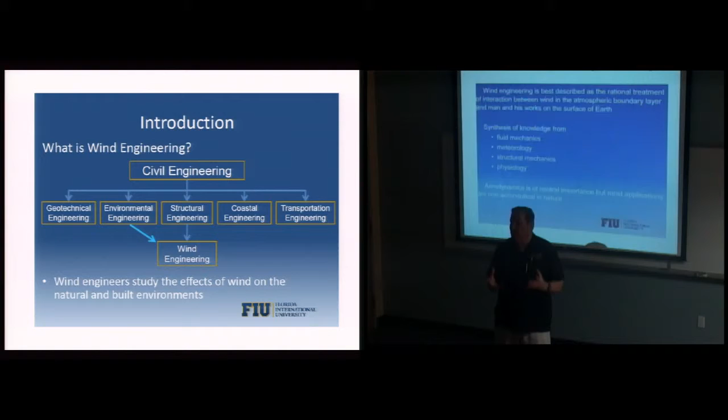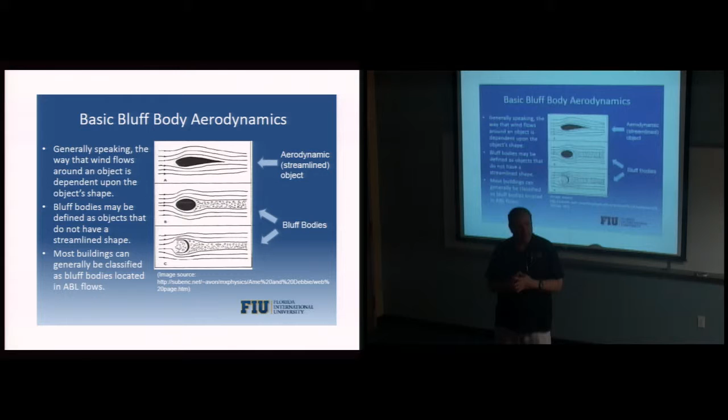You all are going to be able to have a real, firsthand experience working with the real Wall of Wind. Not everybody gets that opportunity, and to be able to come in and use this facility is a great opportunity. On the website, you'll see videos from prior competitions and media coverage, lots of information, and technical papers to learn about the content.

So what we're going to do now is show you a PowerPoint. This PowerPoint is going to talk about this year's new challenge. To do the challenge, you're going to need to understand some of the engineering concepts involved. Each year, some engineering concepts stay the same, but there are also some new concepts related specifically to the challenge. That's what you're going to hear today, along with the rules and guidelines for the challenge.

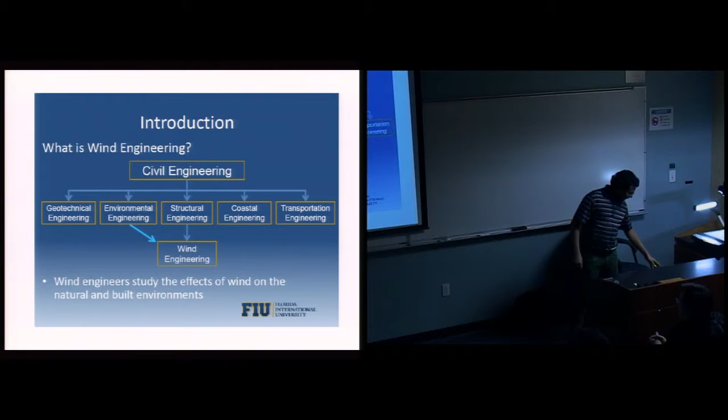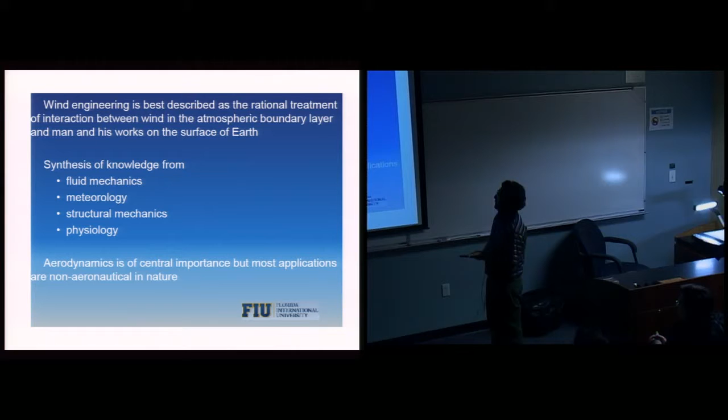Welcome everybody to the Wall of Wind Challenge 2015. As Eric mentioned, we are going to go through some basics. Wind engineering is basically a part of civil engineering, and we always deal with wind-structure interaction. We're going to show you a few things about wind engineering. Wind engineering is a multidisciplinary topic — it involves fluid mechanics, meteorology, structural mechanics, physiology, and other things. Aerodynamics is of central importance for wind engineering applications.

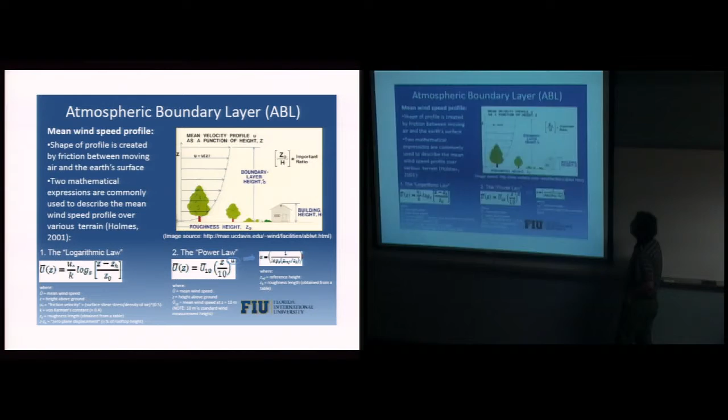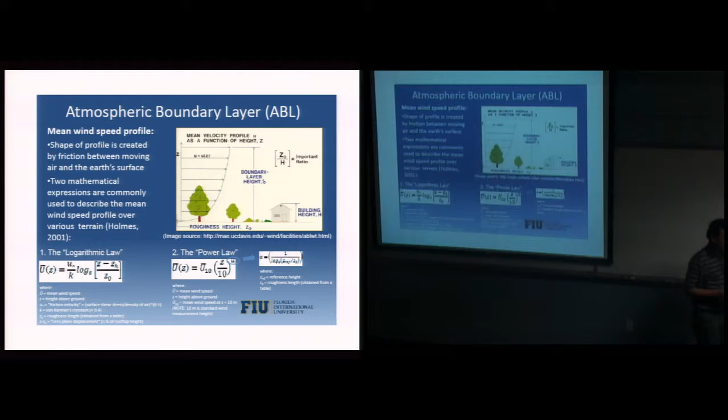For the competition, you need to know a few facts. If you look at this schematic, you see a building and a wind profile. Can you tell me why the wind speed increases with height, and near the ground it's very low or almost negligible? Any idea why that happens? There's a little more friction near the ground, and trees also stop it. Any other explanation?

Okay, I think he's absolutely correct.

Near the ground, we have so many things blocking the wind, so it produces friction. As we move higher and higher, the wind speed increases based on a power law. So when you envision the wall of wind running, the wind speed near the ground will be lower, and it will gradually go up in that profile. That's important for you to understand.

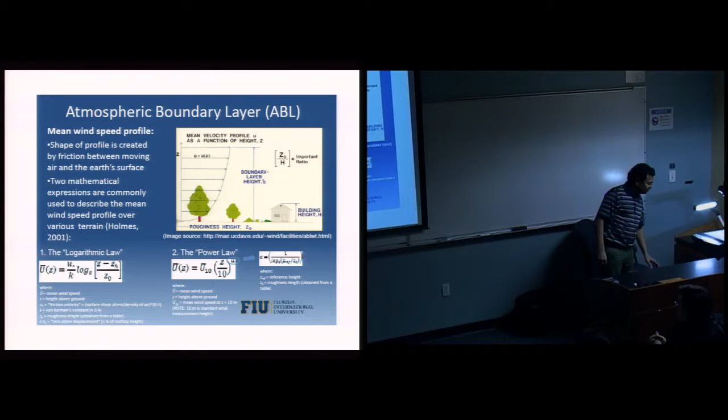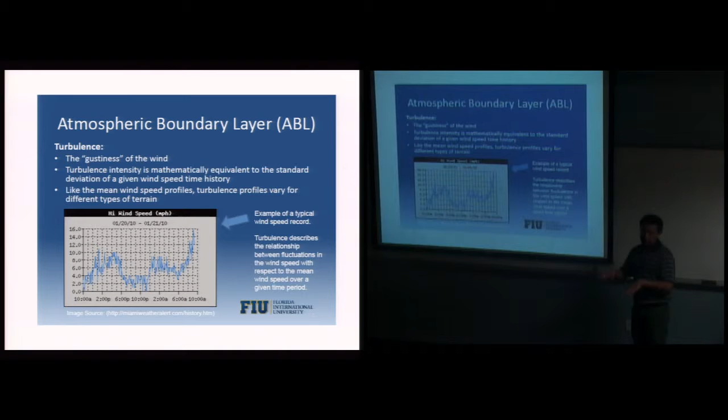Also, as you can see in that picture, the wind speed is not uniform. It's not a constant like 10 miles per hour, but you can see the mean of the wind speed plotted here is about, let's say, 5, and the wind is turbulent, so the speed changes with time. At the wall of wind, you're going to get these kinds of turbulence effects, so the wind is not uniform, the speed is going to change. Sometimes it will go higher, sometimes lower, and that's how it behaves.

Can someone tell me what the top picture is? What does it look like? Exactly.

And these two are more like rounded shape or irregular shaped bodies. What do you see is the difference between picture A and B and C? Let me tell you that these lines we see are called streamlines. It shows how the wind goes, how it varies after it hits the body, and this is the downwind side of the body. So looking at the streamlines of A, B, and C, what difference can you see between those bodies?

Yes. The aerodynamic object is able to utilize Bernoulli's effect so that while it's small, the air goes around and meets together at the same time, while the others are irregularly shaped, so the wind is kind of being violently pushed around that object. Very good. Anyone else?

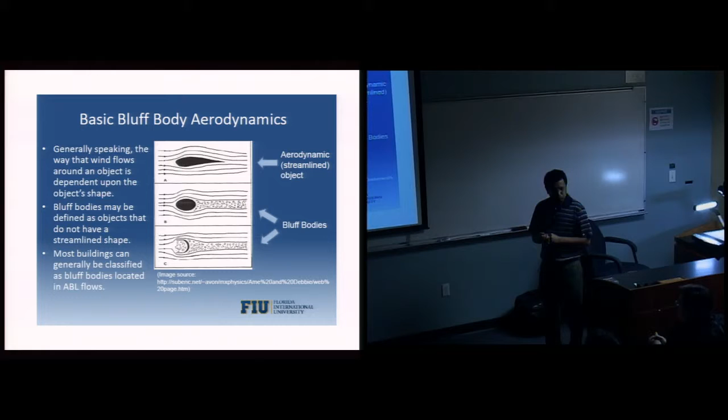Yes, wind turbulence, okay. Because picture A aerodynamically passes through the wind compared to B and C, which actually obstruct the wind and make it harder. More friction is on the object, so it moves that out. The first one flows through the wind compared to the others, which actually obstruct it. Okay, very good. Anyone else?

I think both are very good explanations. So the top body is an airplane wing. It's called an airfoil shaped body, and it's aerodynamic, or streamlined. You can see that the streamlines remain mostly attached to the body.

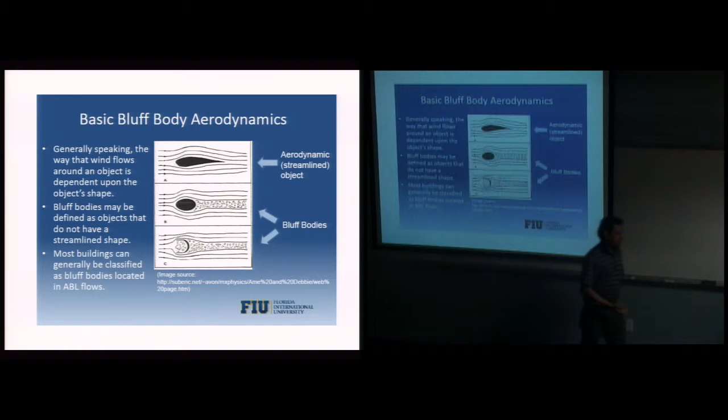Here, because I have a rounded body and this is another irregular body, I form a wake because the wind separates. It cannot negotiate that abrupt ending of the body. So all I have here is turbulent wakes and a lot of turbulence in the flow. Buildings are like that, or any civil engineering objects, because they are rounded or sharp edge bodies, unlike planes, and you're going to see those effects.

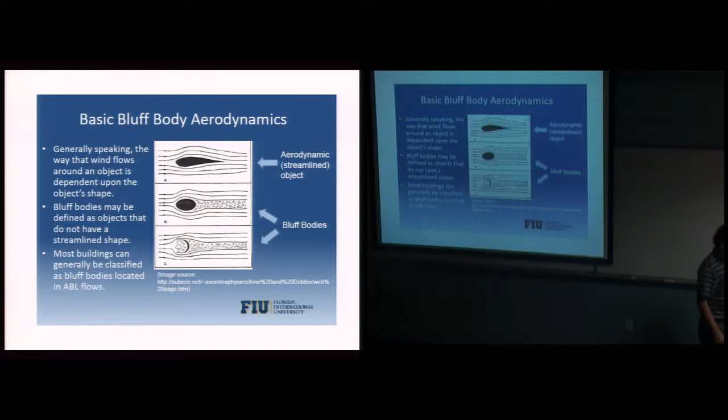So these kinds of bodies we call bluff bodies, and the top one we call streamlined and aerodynamic bodies. This is an example of such a bluff body which has sharp edges.

What you see here is the wind coming and it hits that corner and the wind separates, just like, because it's not a streamlined body like a plane wing. So what you create here is a lot of turbulence and vortex that form, and you can have very high uplift or suction pressures. In hurricanes, you've seen tiles flying off the roof and shingles flying - that's because of that kind of uplift pressure on the roof.

And as the wind hits, some of the wind comes down and forms a standing vortex at the lower portion of that building. This portion is very important for this year's project that you're going to do, because that's what we are looking for, because that's a problem. Why is that a problem? Because if people are standing here, then they feel that wind and those big standing vortices, and it becomes a problem for pedestrians. All right?

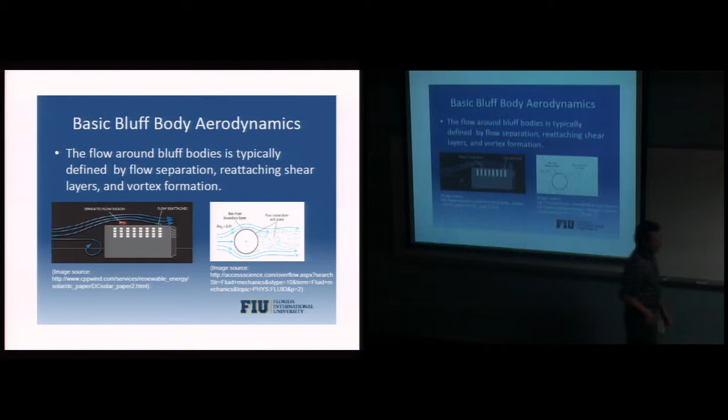A wall. A wall with holes.

This barrier will have an effect on reduction of the wind speed that person is going to see. So without the windscreen, if he sees, let's say, 20 miles per hour, then probably with the windscreen he's going to see 10 miles per hour or so.

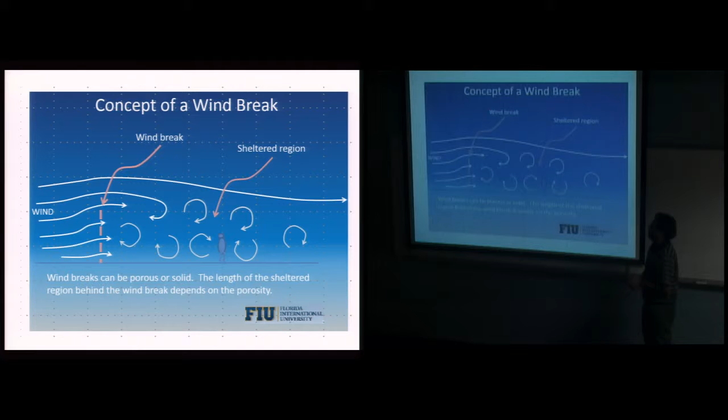And wherever it comes, if people are standing there, they can feel very uncomfortable. So don't ever think that just putting a solid is going to make things good, or putting it very porous is going to make things good. So there is a middle ground of what porosity is going to be the most effective or optimum for this person to feel the least effect of the wind. Is that kind of clear?

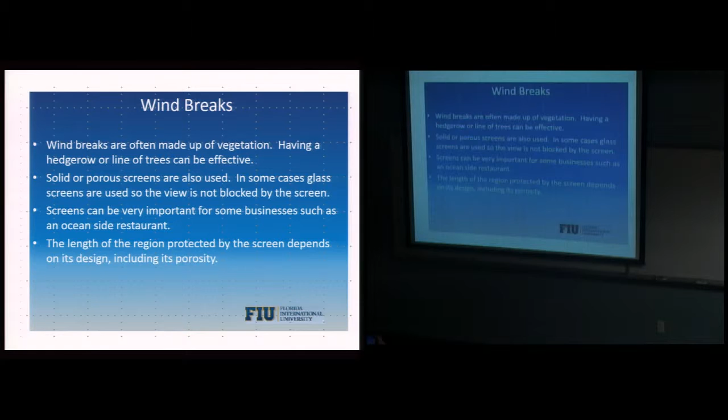Because that's the crux of your project. So wind breaks are often made up of vegetation and other kind of things. We can use either solid or porous screens. You're going to get this presentation, right? Okay, so you can read all of that, but I'm just giving you the main points.

So here is a porous screen, and the porous screen has a capacity of stopping some of the wind. We can define the solidity ratio of this screen by the solid area, which is the total area minus those holes, divided by the total area. That's the solidity ratio. And the porosity ratio is if we just take the holes and divide it by the total area, that gives you the porosity ratio.

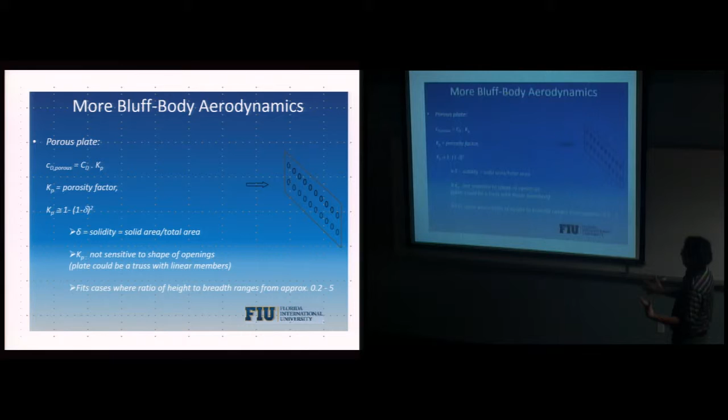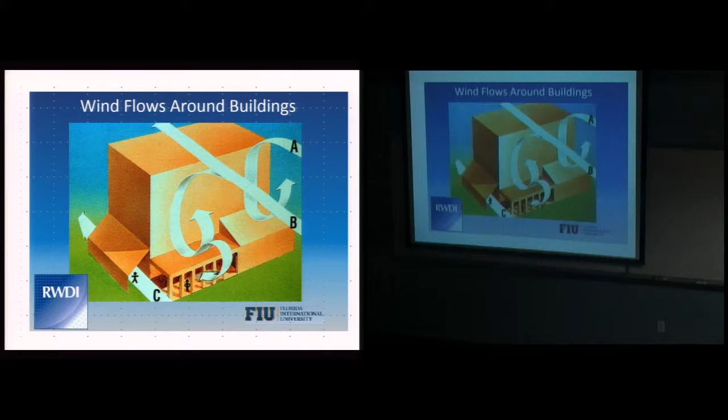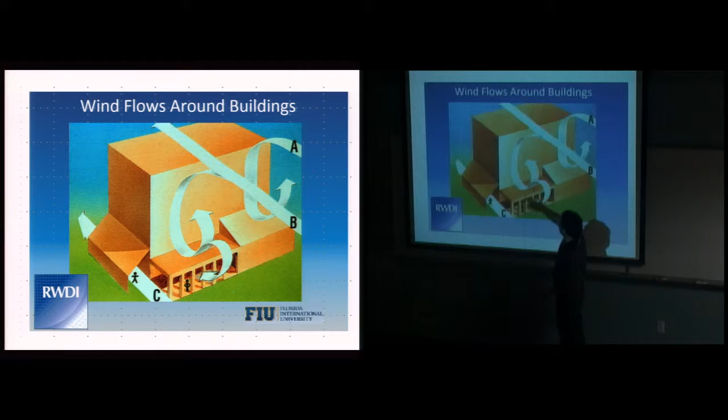So what do you see here? For example, here I have built like a canopy and some person is standing here. So that standing vortex coming is not reaching that person, but it's deflected from that canopy kind of thing. So it's protecting that person from getting high winds.

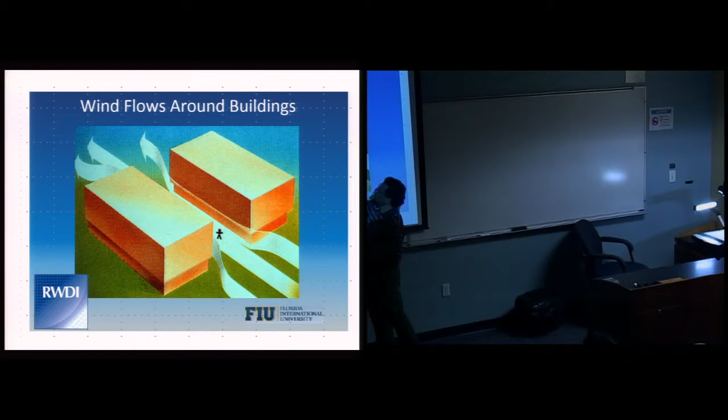Another thing is called the channeling effect. So let's say I have two tall buildings. What happens then as the wind moves, the wind is squeezed between this area because we have like a contraction. The wind is coming and then it forms like a wind tunnel.

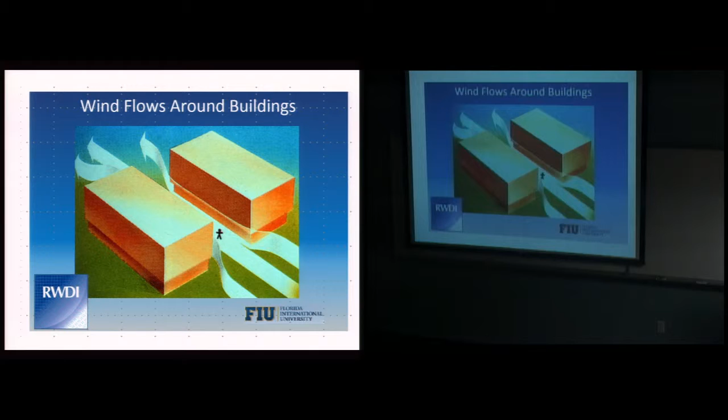So inside that space, you're going to have accelerated wind. If someone is standing between two tall buildings, he can feel very strong winds. So that's another aspect that we need to remember.

So what are the comfortable wind speeds for people? If we are walking, a comfortable wind speed could be anywhere from 0 to 5.4 meters per second. If we are sitting, it's 0 to 2.6, and that's how you convert meters per second to miles per hour. So these are the safety or comfort wind speeds for people.

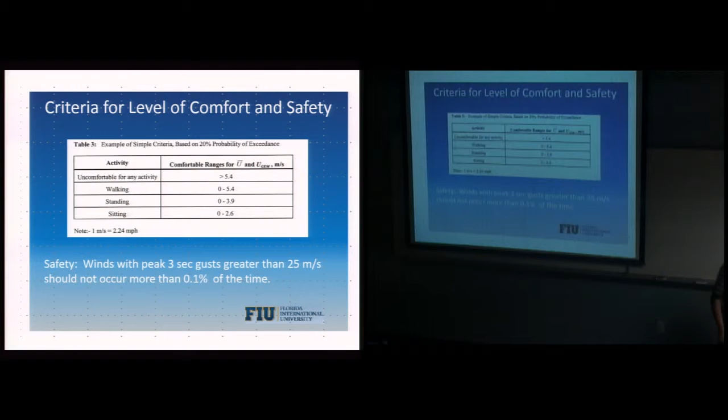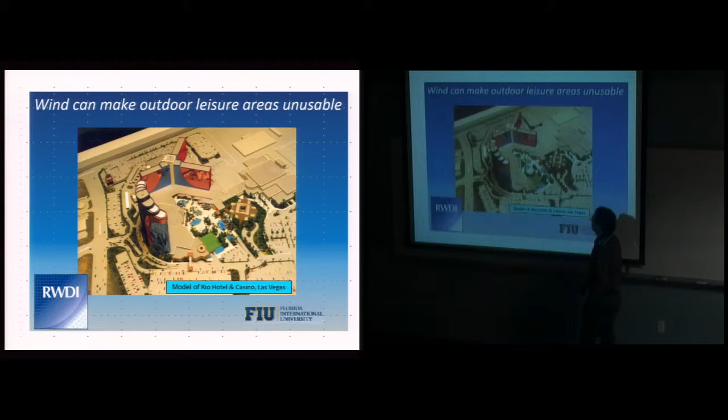Now, if I give you a practical example, this is a casino at Las Vegas. So this building is there, and all that wind that comes is going to hit the building and we are going to form standing vortices here. If I have a swimming pool or a patio or a party going on at the base here, then we have to design this whole situation for the pedestrian wind, so that area is not unusable, because if you don't design it properly, there could be so much wind that whatever people are doing here will be extremely uncomfortable because of the wind getting reflected from the building.

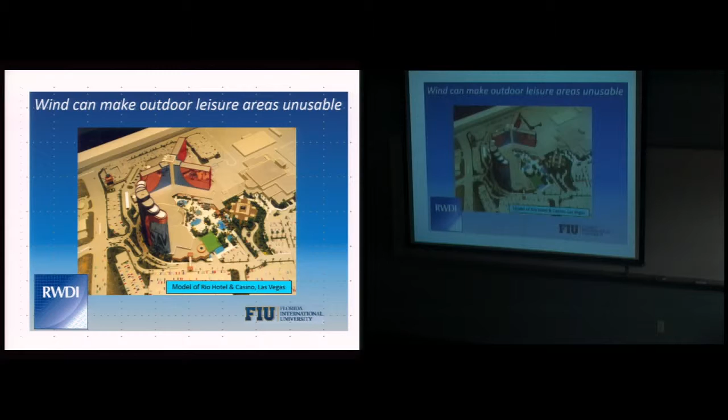How do we do that? We do that through wind tunnel testing. So this is a model of the same building, modeled at small scale using a wind tunnel.

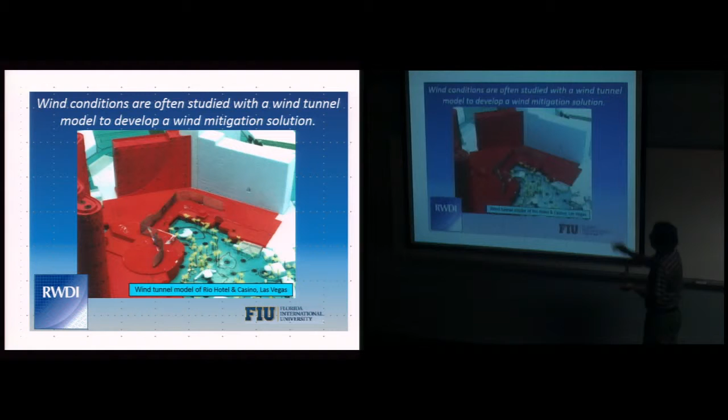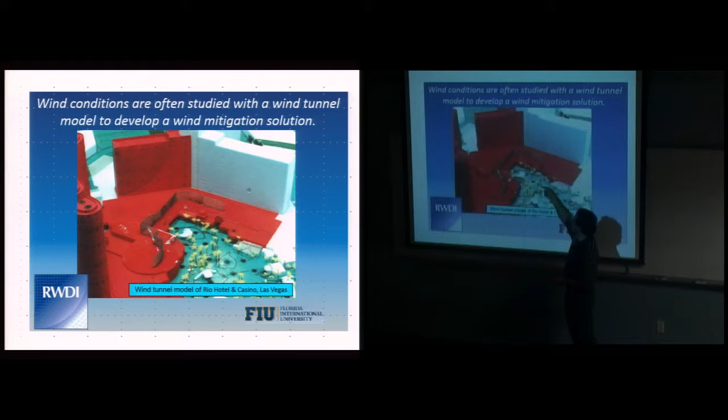Why do I say small scale? It's a 1:100 or 1:200 scale. So you take the building, if it's 100 meters and the scale is 1:100, the building comes to 1 meter. You put a model here, you put all your architecture just like the actual building, and then you put it inside a wind tunnel and blow the wind, and then you study using probes what will be the velocity that people are going to see when they're standing at those locations.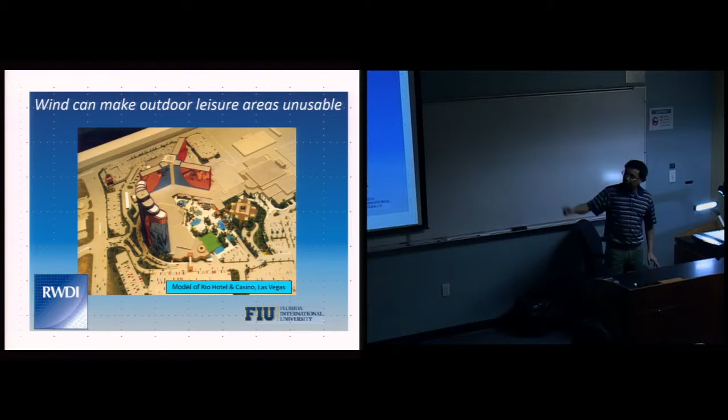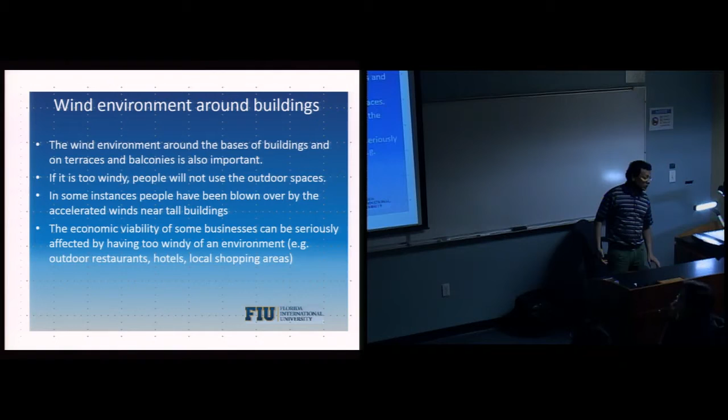From that we can make an estimate of what the winds will be for the actual structure, and based on the table that we showed you, like what are the comfortable wind speeds for walking or standing, we have to make sure those wind speeds are not exceeded. Is that clear? Okay, this is another hotel example.

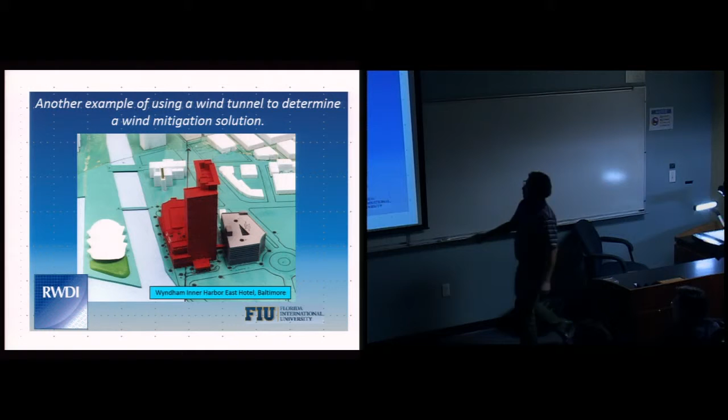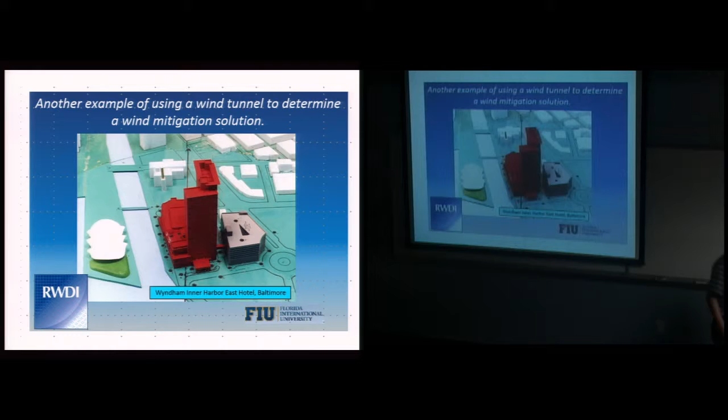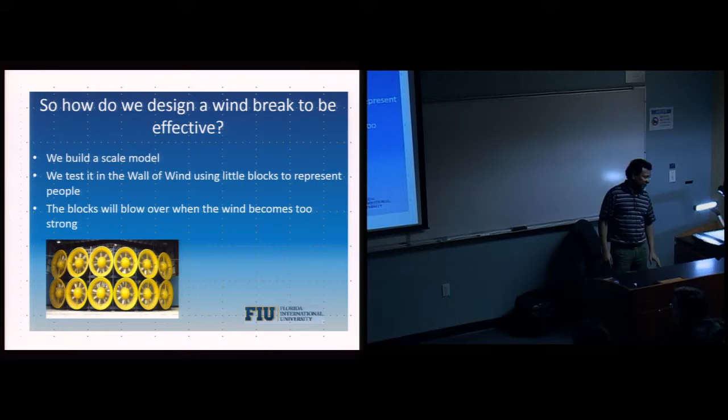Again, this is an example of channeling. If people are standing here, they face the accelerated wind going through the restricted area. So everything like this is modeled in the wind tunnel. This is another wind tunnel model. You have to build a scale model and test it in the wall of wind, which Eric is going to show you after this.

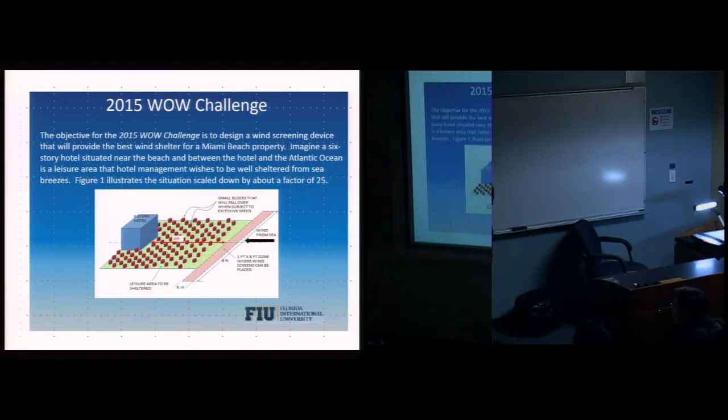And the problem given to you is similar to that hotel, but it's a much simpler situation. What you're going to have is a 6-story hotel. So what is the height of a 6-story hotel? Tell me, approximately.

How much? 120. 120 what? Feet. Feet? Sorry, we're in meters. Meters? 40. What is 1 story? What is this room? 10 feet. 10 feet. 15, 10, 15, so 10 times 6, 60 feet. So we are looking at about 60 feet, or maybe 65 or 70 feet for that building. Okay.

And then what we have here is a 6 feet distance, which I believe is, so this is a model scale. Do you know what the model scale is? How tall is that one? No, what is it, like 1:20, 1:100? Is it given anywhere? I don't know if it is. It would be moving forward if you see it. We can add that if it's not there. But we know, anyway, 25.

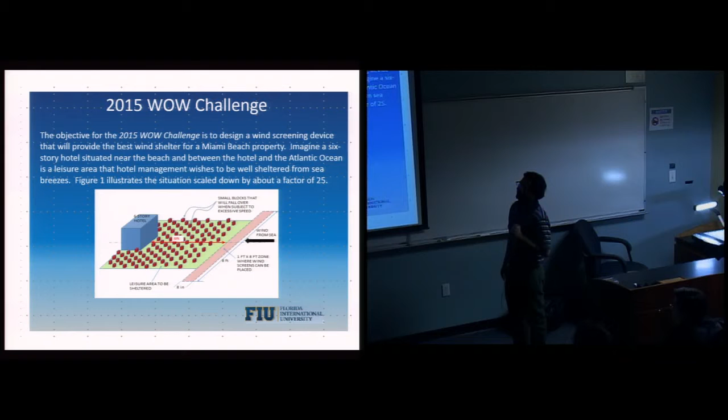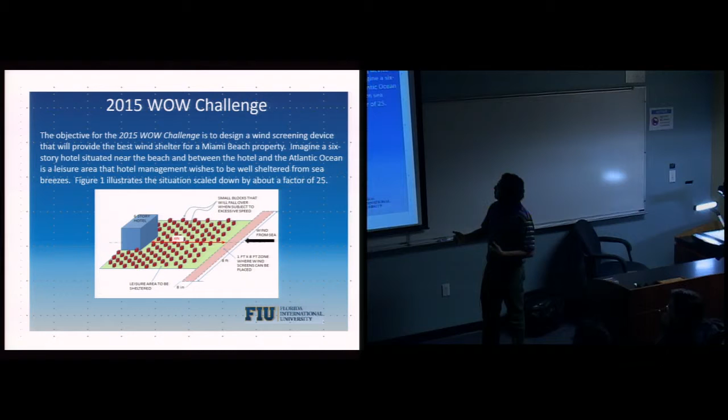This model is going to be provided to you. It will be in the wall of wind, the blue building, and I don't remember what scale we are doing, but it's a factor of 25. Oh, okay, so it's a 1 to 25 scale.

So this scale is 1 to 25. 1 to 25 means, if I have the building as, let's say, 75 feet, just for an example, that hotel, then the model will be 75 divided by 25, which is 3 feet. So this at the wall of wind will be 3 feet. Everything else will be scaled. So when I say this is 6 feet in the wall of wind, what is that in the actual situation? Can you tell me?

150. How do you get that? 6 times 25. Exactly. So everything here, if you want to know the full scale dimension, you multiply everything here by 25. So the 6 feet becomes 6 times 25. That 8 inch becomes 8 times 25 in inches, then you convert back to feet. This 8 feet is 8 times 25, which is 200. So you are given a 200 feet by 8 inch times 25, about 20 feet. So you are giving a 200 feet by 20 feet area, that pink area. It's scaled down to a 1:25 scale.

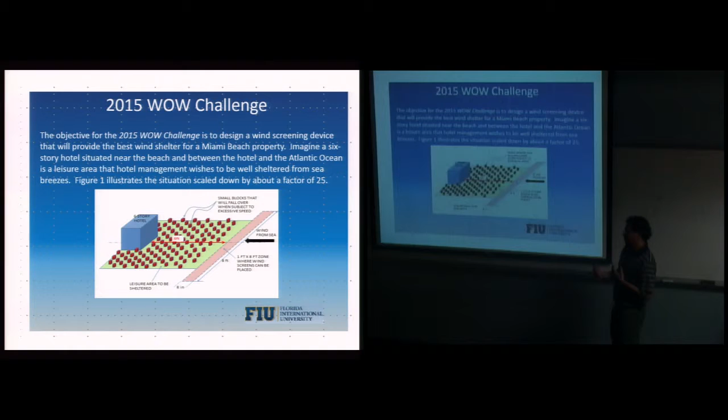mitigating the wind, but it's also about the architecture. You have to figure out what's the best design that's going to protect most people from falling, what will be cost effective, and how aesthetic it's going to look, so people can still see the ocean. All of that has to be bought in by the architect, and that's what happens in practical life.

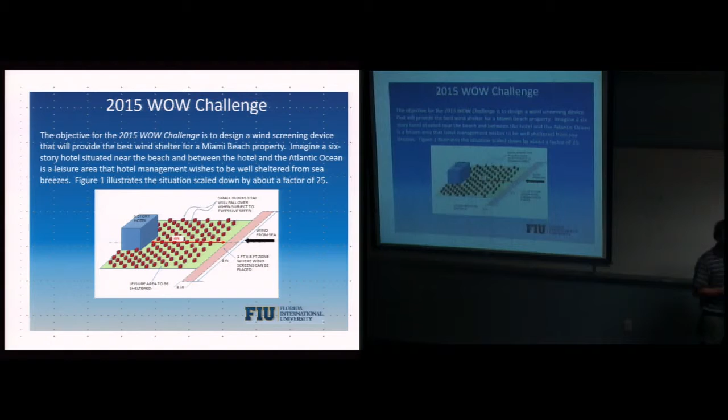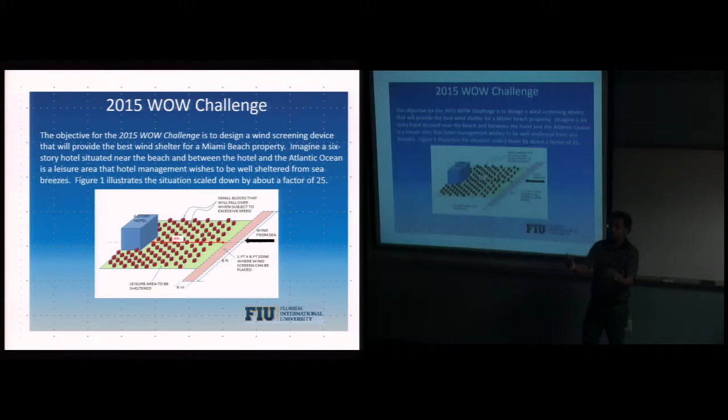You can go and say I want to design this, and the architect of that hotel is going to say no way, and the owner is going to say no way because it blocks the view and I will lose clients. So there are certain rules, definitely.

So here are the rules. Teams are tasked with developing a windscreen that will provide the best shelter for the leisure area, measured by how many blocks fall over as wind speed is increased. Teams must develop and construct their chosen windscreen in compliance with the requirements and restrictions that follow.

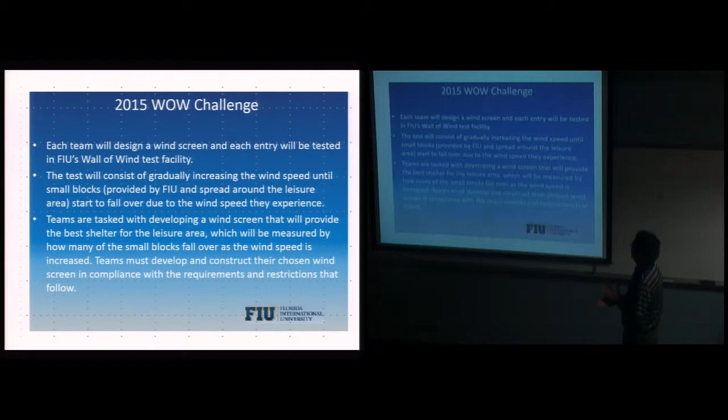So what are the restrictions? Each team will place their windscreening device on a 3/4 inch plywood board—that's the thickness of the board we are going to supply. The board is 8 inches wide by 8 feet long, as shown in the diagram. Other components of the scale model property will be created by FIU.

So we are going to put all those dummy people and the hotel—all that we are going to do. Each team will bring their plywood board with wind screening device to FIU on May 20th for the live testing.

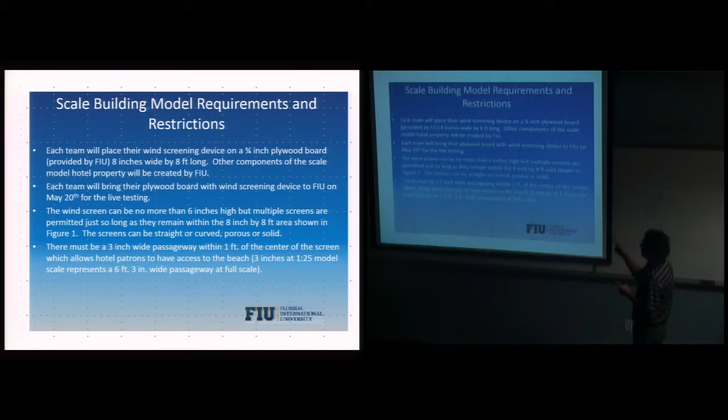The windscreen can be no more than 6 inches high. But as I said, you can have multiple screens just as long as they remain within your 8 inch by 8 feet area, okay? The screens can be straight or curved. So if you think I'm just going to put a single screen shaped like this, you're free to do it as long as you don't exceed the limits.

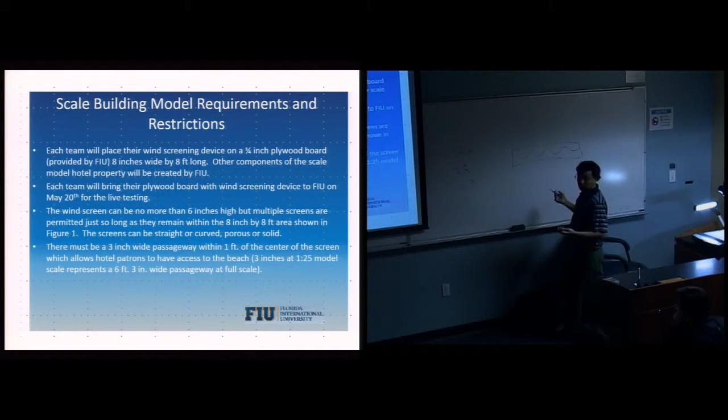You can add another screen if you want in some other fashion. But again, as you put more screens, you have to make sure you're not just shifting the problem from here to somewhere else.

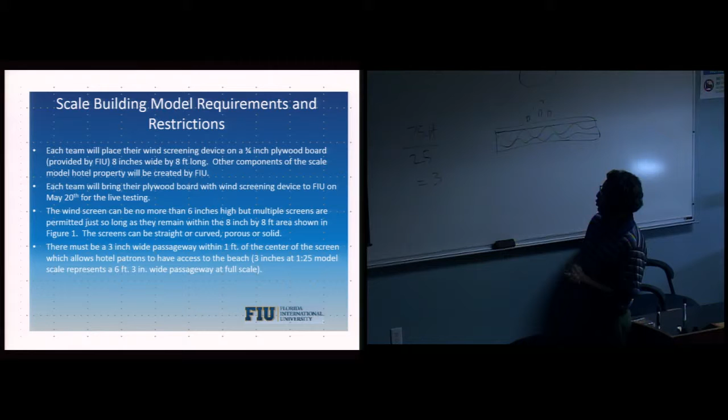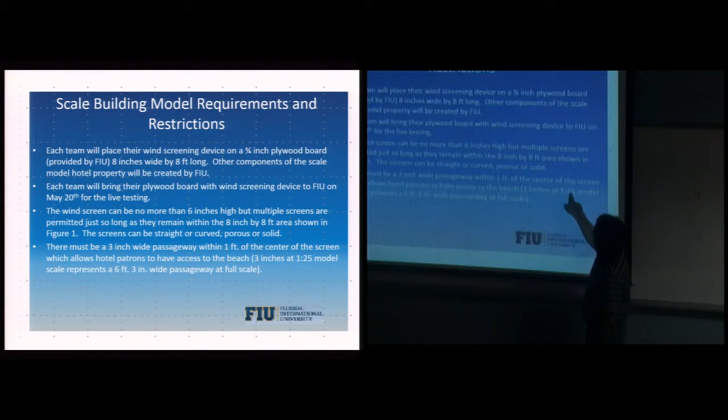There must be a 3-inch wide passageway within 1 foot of the center of the screen that allows hotel patrons access to the beach. So this is another point—you have to have a passageway so people can go through, and all of that is scaled at 1 to 25. So there will be a hole in the screen so people can pass. These are the rules you have to follow.

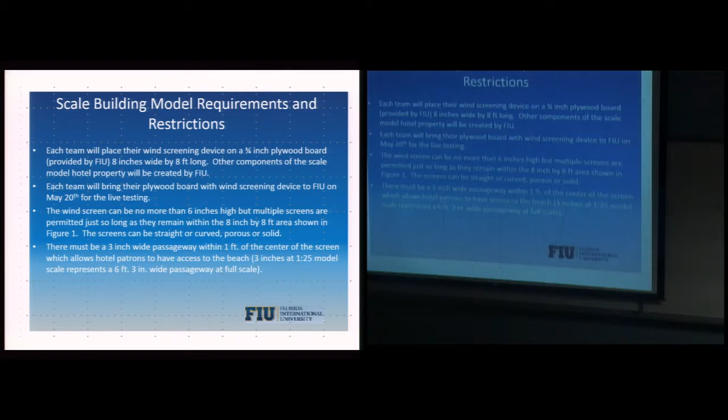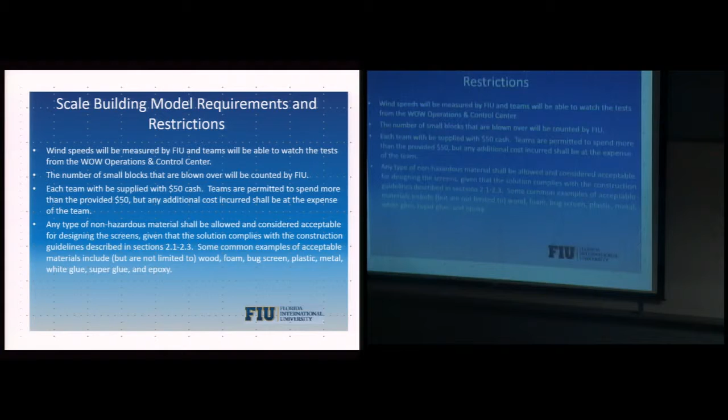We are going to watch the test and see how many blocks are blown over. Each team will be supplied with $50 cash. Teams are permitted to spend more than the provided $50, but any additional cost shall be at the expense of the team. Any type of non-hazardous material shall be allowed and considered acceptable for designing the screen.

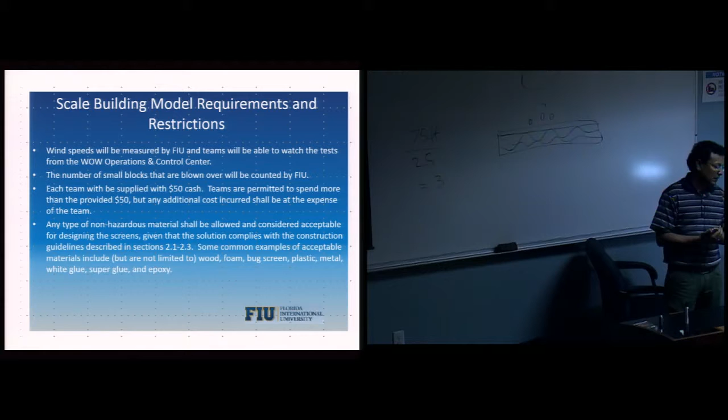So you might choose foam, wire, plastic, porous material, or anything you want, given that the solution complies with the construction guidelines. Some common examples of acceptable materials, but not limited to, include wood, foam, bug screen, plastic, metal, white glue, super glue, and epoxy.

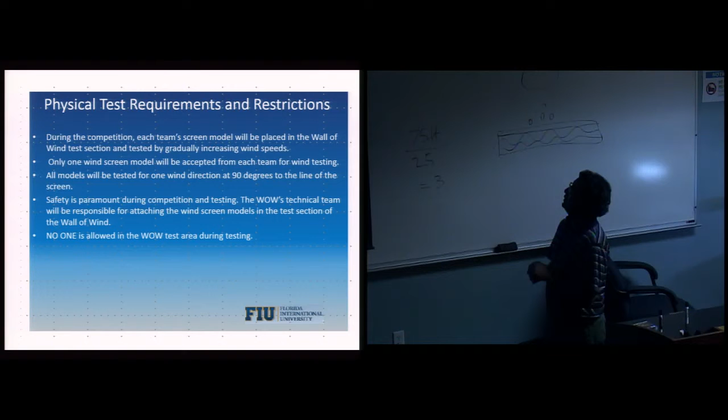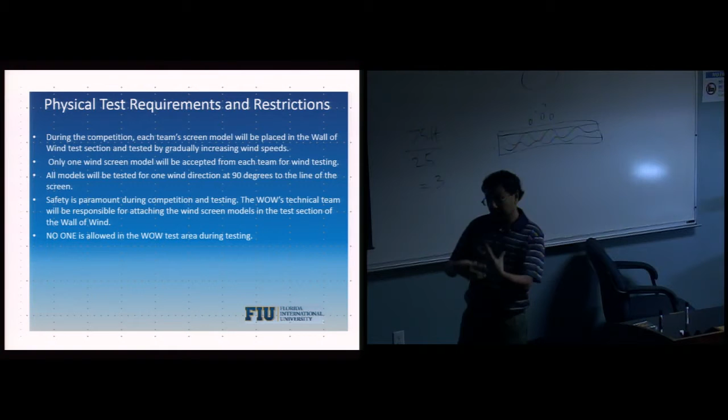During the competition, each team's screen model will be placed in the wall of wind and tested by gradually increasing wind speed. It really gets interesting—you'll be sitting there and one team goes to test. We start the wind speed at 15 miles per hour at the wall of wind, then increase it to 20, 30, and you'll see things falling off. Only one wind screen model will be accepted from each team for wind testing.

All models will be tested for one wind direction, 90 degrees, so the wind is blowing straight to your fence and the hotel. We are going to go to a certain wind speed and see how many things are falling. That wind speed will be constant and the same for all teams. Let's say we go up to 100 miles per hour, then we'll see which team gets the highest points in the wall of wind testing - the team with the least number of blocks falling off at that highest wind speed.

No one is allowed in the wall of wind test area during testing. All of you will be sitting inside the control room, because that's the regulation.

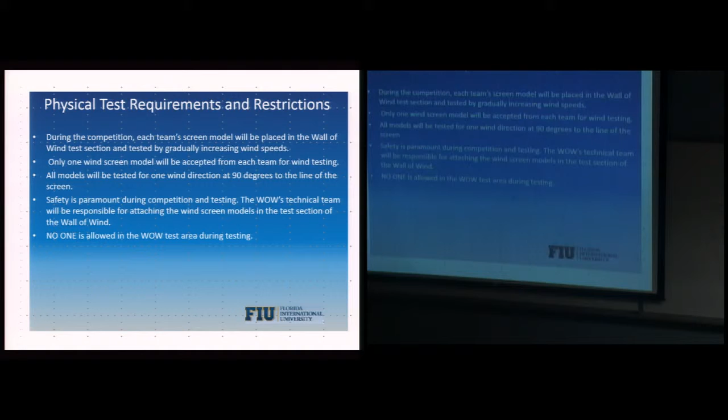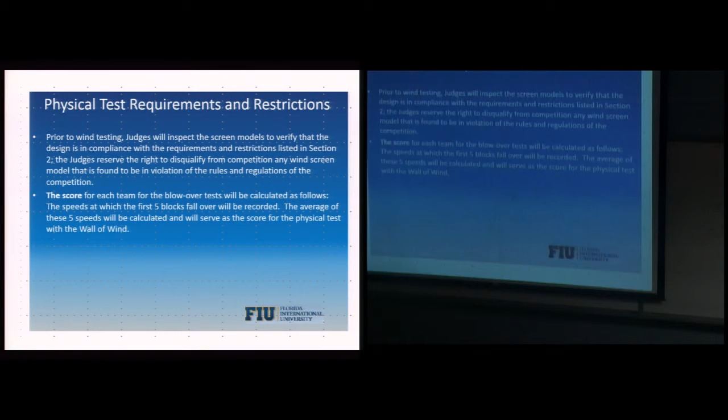There will be judges who will watch, and you're going to make a presentation to them. Eric, if you want to explain that part to them, you can come up. Any questions before I give it to Eric?

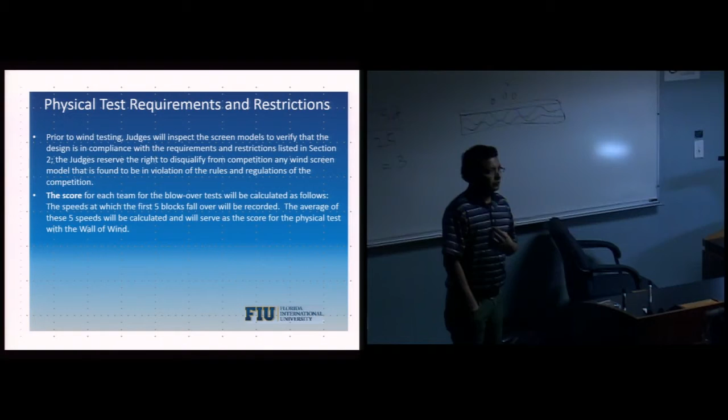For materials, would honeycomb be allowed? Yes. And honeycomb can be made out of any material - it could be foam, it could be cardboard. Yeah, definitely.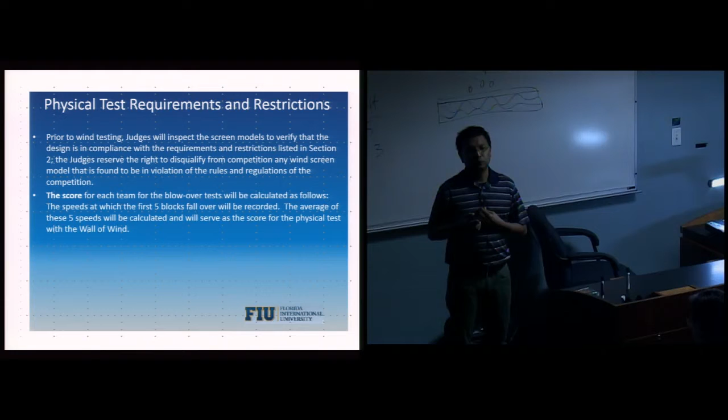Any other questions? Deadlines? I'll explain the deadline. All right, thank you, let's give him a big hand.

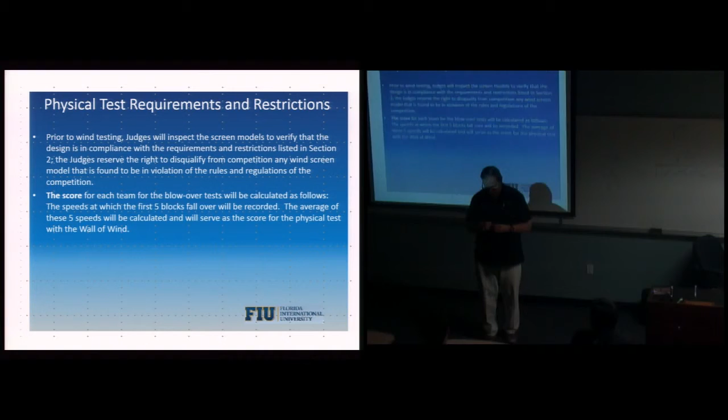This is a unique experience to be able to test your project with the real wall of wind, and then also get a presentation by Dr. Chowdhury. He is one of the experts in the world in wind engineering and using the wall of wind, so this is very exciting for all of you.

I think the one comment about finding the right porosity and so on - this kind of phrase, the sweet spot. Find that sweet spot. I think your comment was a really important point on this competition - finding that sweet spot of porosity or non-porosity for this.

Also, I'll mention the oral presentation. That'll be a live part of the day as well. All the details of that will be given to you, but it's roughly a 7-minute presentation.

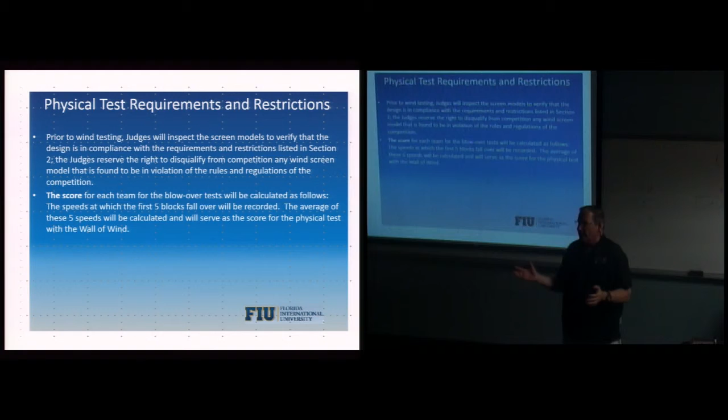Of the 4 students that are there that day, all 4 can participate in the oral presentation, or just one - either way, the other 3 can just be helpers. But for that oral presentation, you're going to show a PowerPoint, you can show video, you can have hands-on things in front of you, you can use all the multimedia that you want for that 7 minutes. But it only can be 7 minutes, which means you should practice through your PowerPoint, practice your presentation.

Dress code is going to be professional dress code. Part of the oral presentation is also going to be, I believe, pretending that you are an architect or an engineer, and this is going to be a brand new hotel in Miami Beach, and they need to have this wind block. You're going to be an architect or engineer applying or bidding for that project.

So you're making a presentation to sell your project and tell them how valuable it is and how it's going to look. You have to think in terms of those kinds of presentation skills for the oral part, which will be on the day of the competition, as well as the physical test.

Again, I'll be providing the PowerPoint to all of you on the web page, and I'm going to email it to all the team teachers. This presentation, as I said, recorded, will stay on the website.

All questions are good questions - big questions, little questions - as they come up, please feed them to me via email. We'll make sure they get answered as quickly as possible.

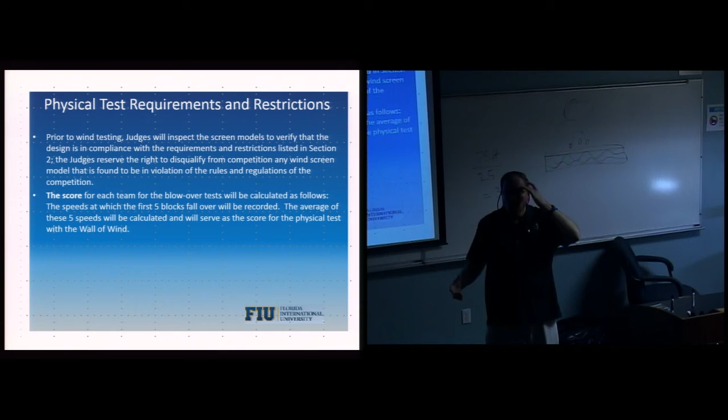As I said, all of you are going to receive the long, 8-foot by 8-inch piece of plywood. That'll be delivered to your school, or you can pick them up here. So you'll be provided that, and the $50 in cash to help buy some of the materials as well. And as I said, transportation will be provided for you, and that'll be arranged before May 20th.